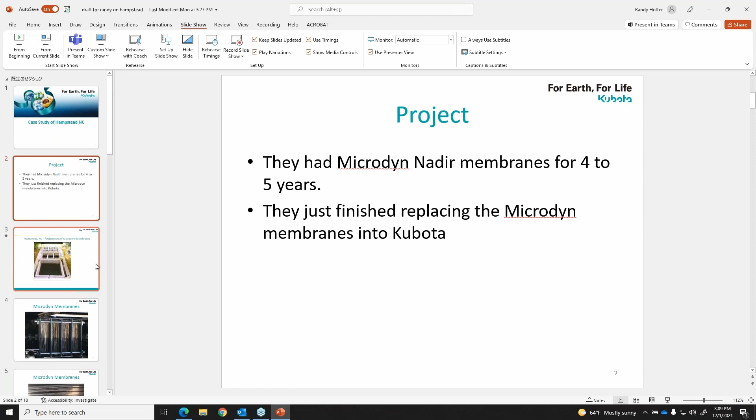Okay, all right, so we'll go with this. So we started off with Microdyn membranes, 250,000 gallons a day worth. And as Randy said, we started off with a very small flow because it's a brand new system in an area that had not previously had any sewer available in Eastern North Carolina. And we have 2 millimeter fine screens, perforated drum, stainless steel screens, and we are treating with a process with biological nutrient removal.

So our phosphorus limit is 2 and our nitrogen limit is 4, so we had to get a pretty good effluent quality out of that. So MBR was the logical choice for that, given our experience.

One of the things we started out with, and I heard it mentioned on the previous talk, was the Microdyn membranes had a pore size of 0.04 microns, and the Kubotas, I think, have a pore size of 0.4. So when we first were introduced to the new Microdyn membranes at 0.04, I thought, well that's fantastic because we're going to get that much better filtration. And as the previous gentleman said, that's not necessarily the case. I think there's an issue with that pore size being that tight, and there's some technical issues with that, maybe not having it back pulsed or something. I'm not exactly sure, but suffice it to say, within time...

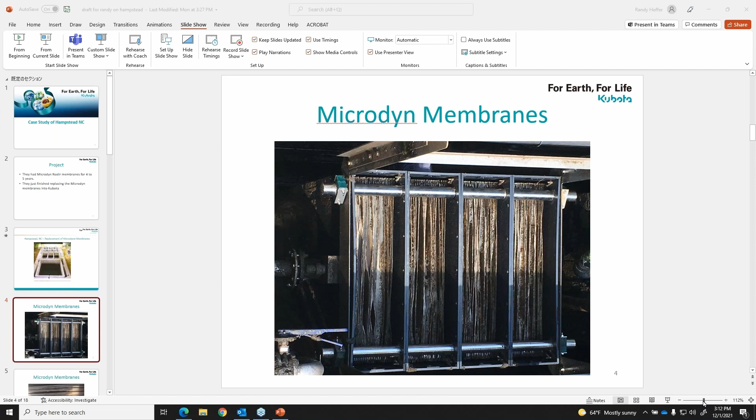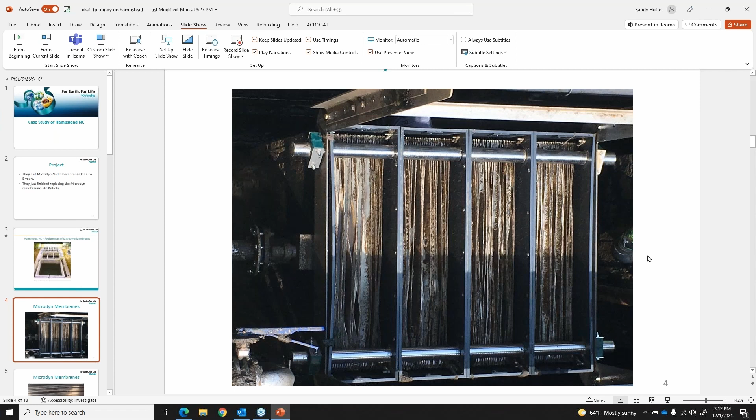So we were having issues with the membranes not permeating, not meeting their flux. So we had the supplier come in and talk to us several times and try to help us out. We could just never seem to get over the hump with them. So after a lot of trial and tribulation, we decided to make a change to the Kubota SP membranes.

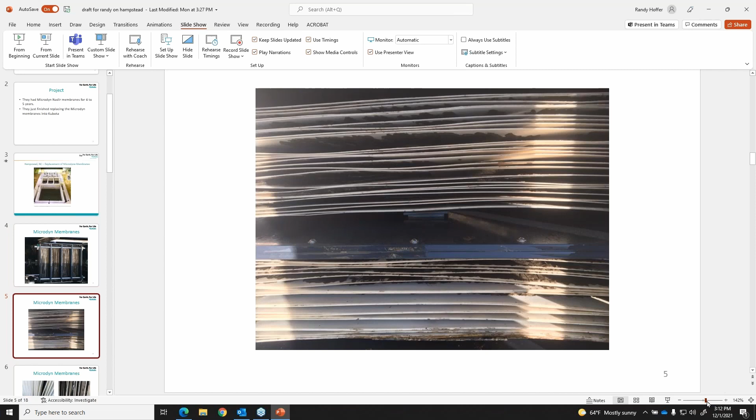One of the things you'll see, like we're looking at this picture right now, with the old Microdyn membranes, even when they were shipped to us new, a lot of the membranes seemed stuck together, either from static forces or what, I don't know. We were told that as you ran them, the air would go between them and they would separate and that would be fine. I don't know that that was necessarily the case, so we had all kinds of issues with these things.

So the SP membranes are a lot more rigid, and the actual membrane size itself in its structure is smaller, so you're not going to have those membranes hitting each other and touching each other like you did in the Microdyn membrane. So after having a lot of trouble with the Microdyns, we switched to the Kubota membranes and have had pretty good luck with them so far. Even though the pore size is an order of magnitude greater, we haven't had any problems meeting our nitrogen and phosphorus limits.

And we're now running, I think, around how many gallons a day? About 230,000 gallons a day right now. So we're up at the limit of the first phase design, and we're still meeting all our limits with the Kubota membranes. So that's good, and we're excited about that. We've had those membranes in place now for how long?

The new membranes have been in since March, so we'll be coming up on a year this March, and we're hoping they'll continue to have good success with them.

A membrane plant produces really good effluent, but if the membranes are damaged, falling apart, or aren't permeating, that's a real problem. You can't really run the plant that way. Anybody who's been through this before knows that if your plant's not running right, the water's still coming through the pipe no matter what, so you've got to be able to treat it and dispose of it. It's important to have working properly.

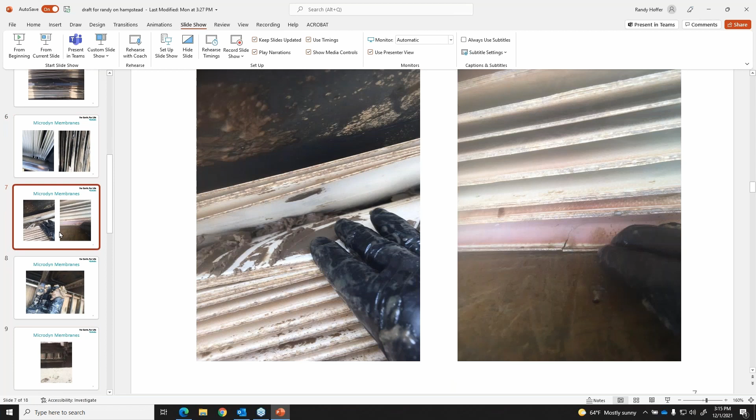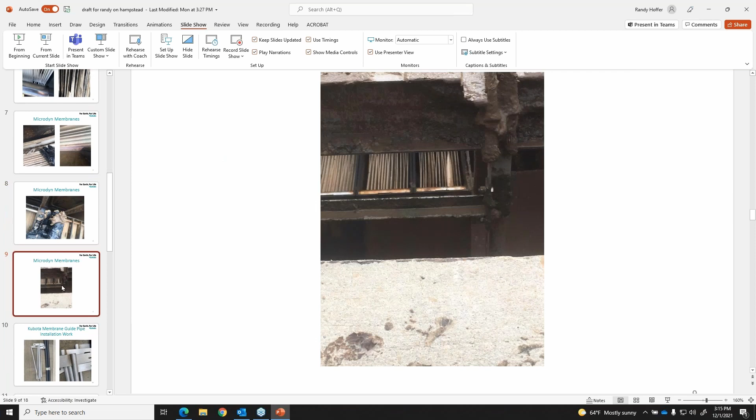So Randy and his crew have actually replaced membranes with Kubota membranes more than once. There was another plant where they did the same thing, so they're kind of an old hand at it—pretty good at it. I'm a design engineer, but I'm not at the plant every day. Randy and his guys are there every day, and they've probably forgotten more about these membranes than I'll ever know. So I'll let Randy take it from here.

And if you have any questions as far as engineering goes, please feel free to ask.

Thanks, Mike. Again, I want to point out on some of these slides you can see the separation of the sheets, and if you come back into this one here you can see where the header is. These rings—we had a lot of rips and tears, and there were a lot of rips and tears on the sheets as well.

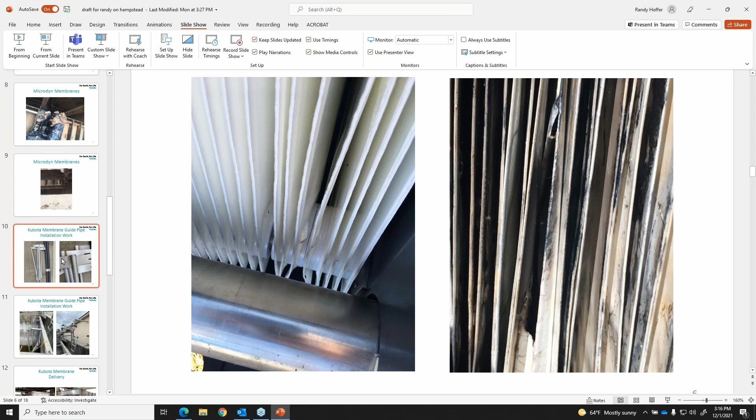This is a brand new membrane—that's how it came to us, but they determined that would be okay. Like Mike said, we finally pulled the trigger and switched to Kubota. As we did that, they sent us everything you need to do the upgrade.

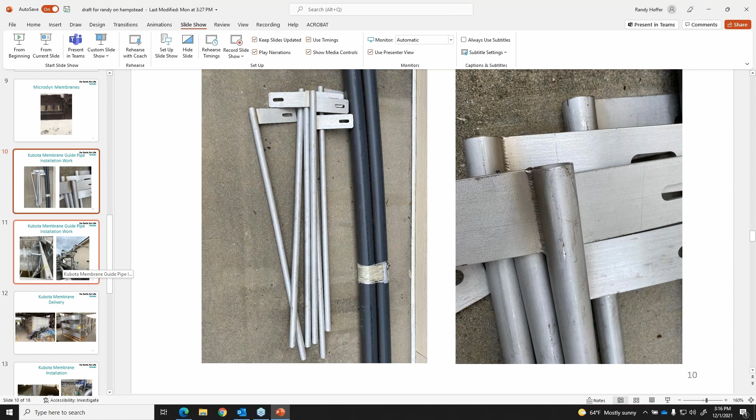You can see the hold down brackets, the Schedule 80 PVC. I have a collection crew in-house, so we just did everything ourselves—we rented a boom truck and a forklift. You can see this is us wherever we were going replacing.

We had to replace this I-beam because the beams were going the other direction. Then we just bolted these in, and you can see the guide rails here, and the leveling plates in the bottom. All of those were installed.

I would recommend, on this stainless steel, that whoever's installing these does it on the outside of the basin, just because of any shavings or material. One of our priorities when doing this is we come back and clean it with a pressure washer and a shop vac, because you want to make sure everything is out of that basin before you put the membranes in.

The other thing to take into account is the telescopic valve on one side—you've got to make sure you have enough room for those. The picture on your right shows the updated air header that we modified. The existing membranes we took out had 4 diffusers, but the Kubotas only needed 3 because we did a 2-stack unit with the SPs.

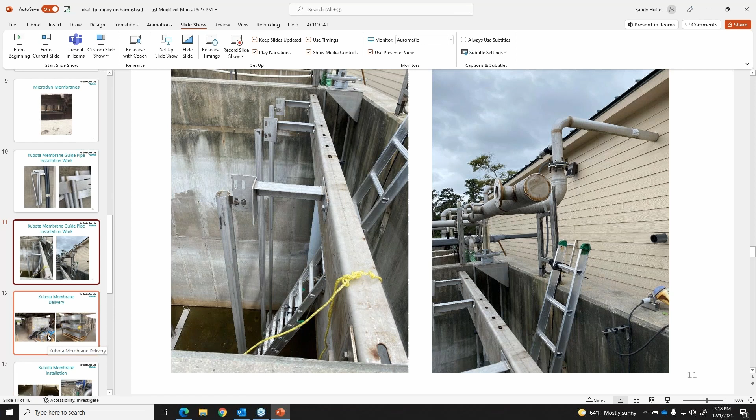These just flop down and connect on—like I said, we never installed these before. It took us a week to pull out the other membranes and install these. The nice part about this facility is it had 2 other trains, so we could keep it in operation. We weren't really under as much pressure, and we weren't pumping and hauling like in the first case study.

I would recommend you take off these little wooden blocks before you install them in the basin—you do not have enough room in there otherwise.

So, but Roscoe, being the magical guy he is, he got them off there for us. So it's very helpful with putting these in. And then got another slide here. This is putting in the levelers, and then we just put the hydraulic cement around the bottom, and then the diffusers bolt right to the top of these.

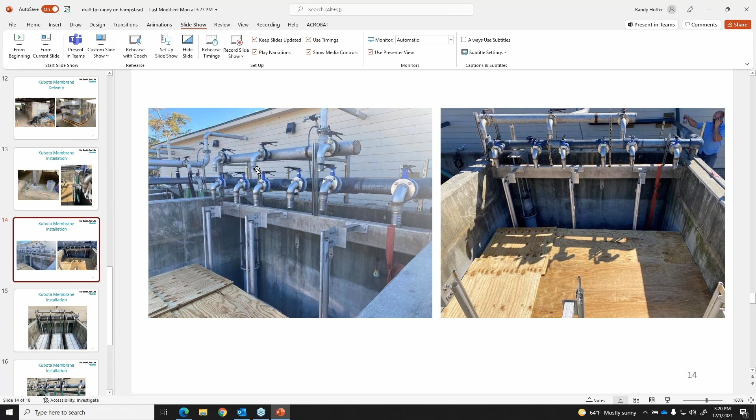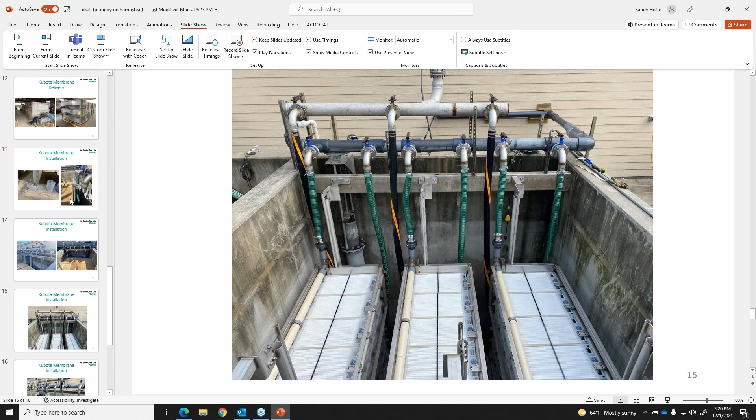Again, you can see where the air header was shortened. They just welded in where we had the 3 diffusers, and then we have the 6 permeate heads. I will tell you, it's a lot nicer to come through. Well, you can see there's where the connection hoses are. Another recommendation that I would have is about putting these hoses on to these barbs. We actually had to go and buy a big pot to boil those hoses to get them hot enough to where we could slide them up over those barbs, and then we put the connections in on each one.

This is the final product here. But like I said, this is after it's been cleaned. To go back to here, we actually cut out a piece over on the side, and we'll go down about 2 inches, and we'll put in a little 2 horsepower pump. And that does 2 things. One, it helps us with this dead area that's underneath the diffusers. No matter how you try to do this, you're still going to have the bottom of that basin. It's not going to suck everything up out of there. So we use that little 2 horsepower pump, and it takes everything off the bottom.

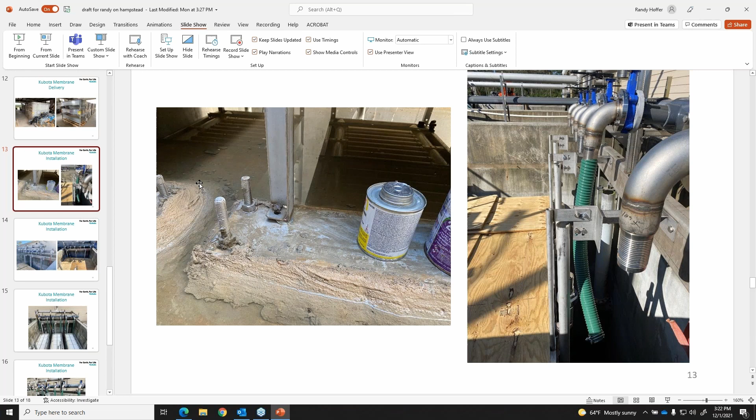Again, right here, and then with these unions that we put in, re-grease the O-rings, make sure that you don't cross-thread those. With the air header, with the heat, we switched those out with the recommendation from Kubota. They recommended the Goodyear hoses. Again, that was just with the 3 diffusers on the bottom because they're dual stacked.

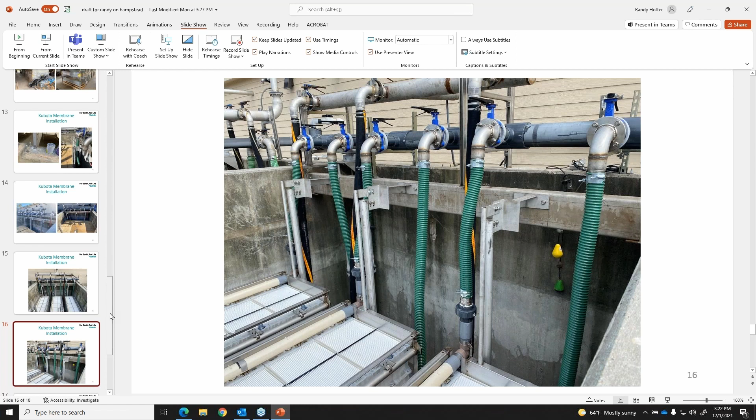You can see after we did the startup, very good with the diffusers. Not really any dead areas right there. A lot better than the previous ones that we had in. We've cleaned these one time in March, and it's only because we hit our 6 months, so we haven't had any problems. We went from cleaning 2 to 3 times a week to cleaning once every 6 months, and we calculated that the savings over 3 years will basically pay for the cost of the membranes.

We like them so much that we purchased the next 2 basins, and we've also installed another 500,000 gallon unit at North Topsail. We are waiting on a shipment now to do the other 500,000 in the beginning of next year. So we're definitely all in with these guys. We're very impressed with the product that they're putting out. We don't really see that there's much issues.

I would agree with what's been said today. Very important with operators, and I think your screening is one of the most important things you can do, because once you get something in there, I've seen where they were getting small holes in the side of their membranes, and I would possibly think that that's something that's getting past your screens.

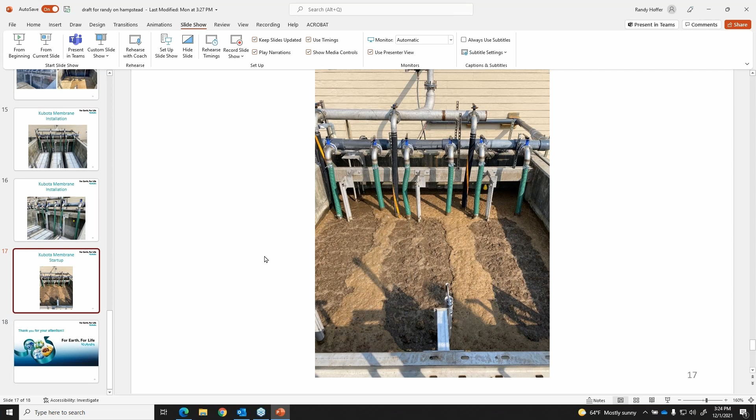But our permeability went from 3 when we first fired it up to 99. I'm pretty sure 99 was as high as it would go. We didn't make any changes to the PLC or the HMI; the settings were very minimal. It was kind of like a plug and play. Like I said, it took us a week, and right now we're running 170 at peak through just the one basin. So we're getting ready to do the expansion on the other 2 and the expansion here at North Topsail.